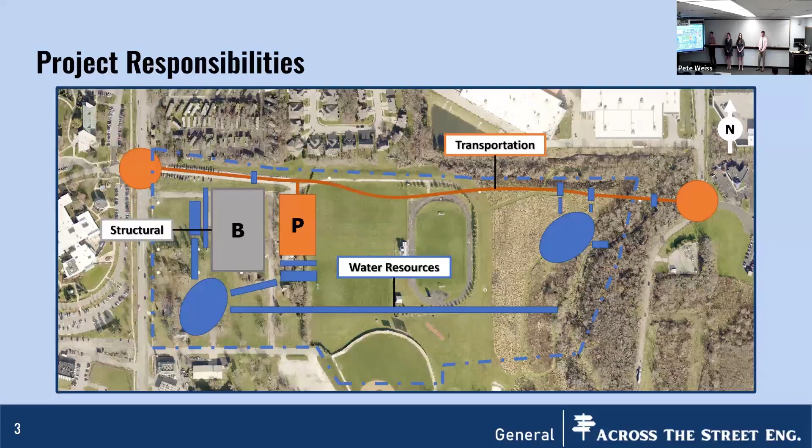As a bit of a reminder, these are our project responsibilities. We've been tasked with, in orange, transportation facilities connecting Silhavy and Sturdy Road, as well as pedestrian facilities and a parking lot to accommodate the new academic building seen in gray. And then in blue, we see the water resources portion, which is managing stormwater runoff. To start us off technically, I'll pass it to Jolie Overstreet.

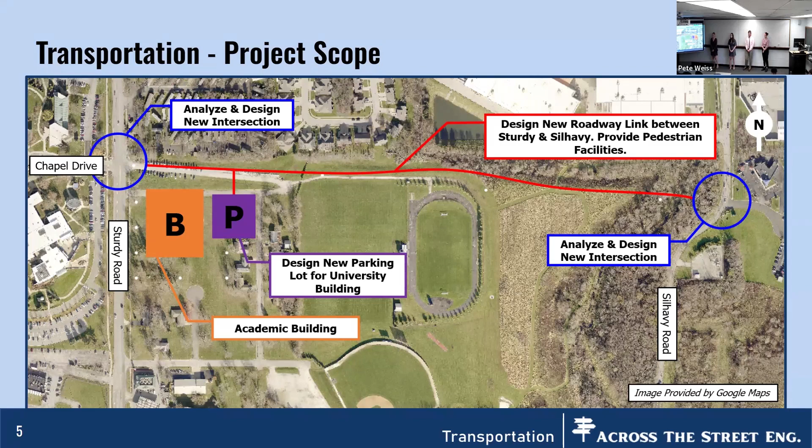Thank you. So Allison briefly went over my scope for the transportation side of the Eastgate development. Just to remind you, I was in charge of designing the new roadway between Sturdy and Silhavy Road, and this will be referred to as the Chapel Drive extension. Along this extension will be pedestrian facilities. After that roadway was designed, I also analyzed and designed new intersections at Chapel Drive and Sturdy Road, as well as at Chapel Drive and Silhavy Road. And finally, I was tasked with designing a new parking lot for the university building that will be developed on the Eastgate site. So the first thing that I looked at was the design criteria.

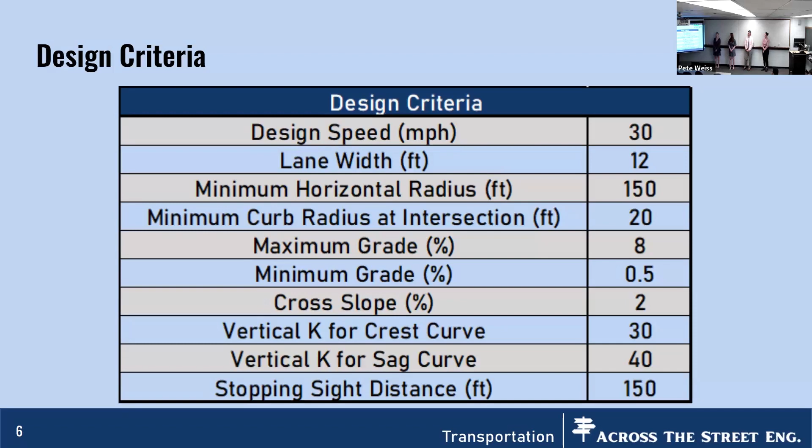All of this design criteria meets the Valparaiso city standards that are posted online, with the exception of the lane width. The city of Valparaiso outlines that they would like a 20-foot lane width. However, we spoke with the city engineer and they approved a 12-foot lane width for this project because we won't need any on-street parking here. And so with that, we can start to take a look at the typical sections.

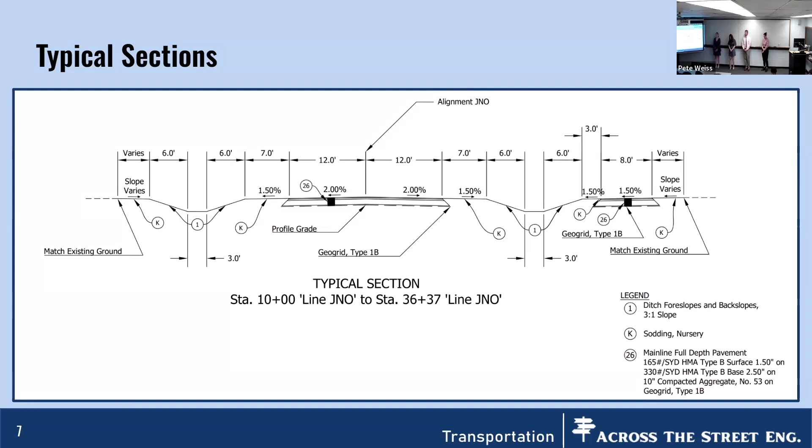You can see that there's 1 travel lane in each direction, both of which are 12 feet and have a 2% cross slope. Over on the right side of this image, which would be the south side of the road, is an 8-foot multi-use path. Both of these use an HMA typical cross section per the Valparaiso city standards. You can also note that on these typical sections, all of the water would drain to the ditches off the roadway, in between the roadway and the multi-use path.

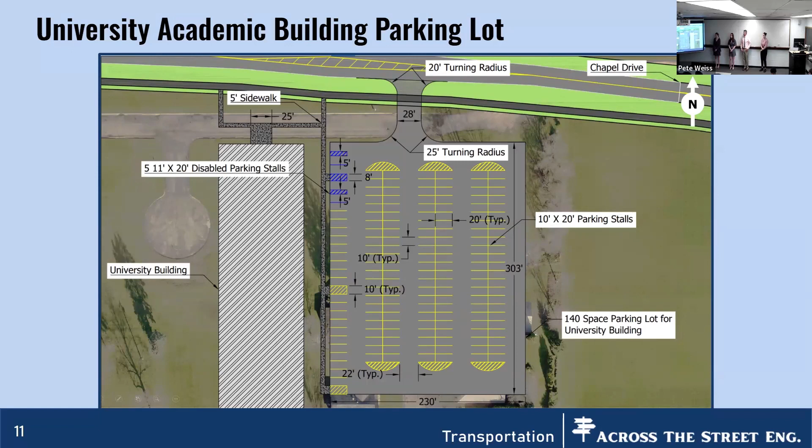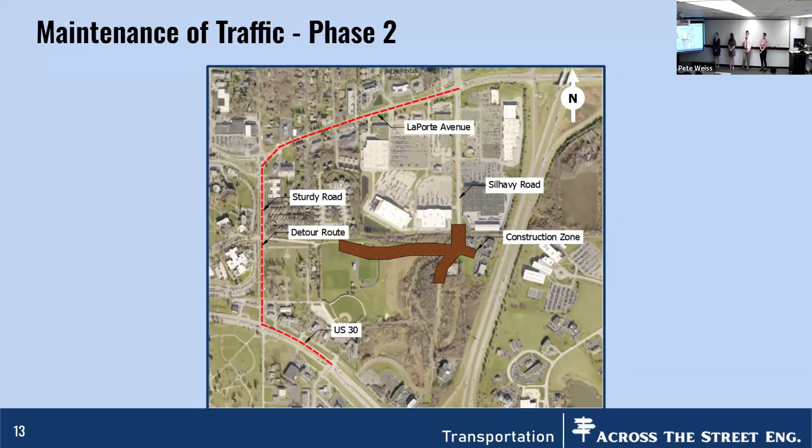And in order to design all of this appropriately, we had to come up with a construction cost via the INDOT bid items list. And so the major costs that we had within this project were excavation, aggregate, and then the signalized intersection. And it comes to a total of about $3.3 million. And then when you add in the 20% contingency, it's about $3.9 million. And so with that, I will pass things along to Bella, our structural engineer.

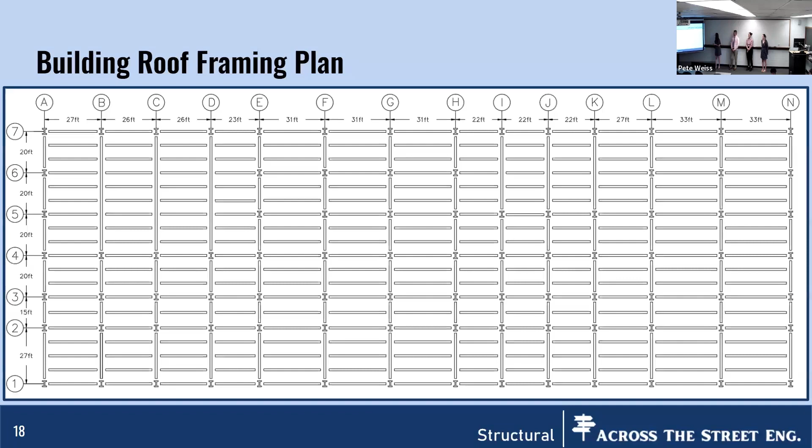Taking a look at the roof framing plan, we see that there are varying beam and girder lengths, and this is a result of taking into consideration building components as well as existing buildings on the university's campus, as well as published values for different occupancy sizes and room sizes. And that's where you get the variation between all of the member lengths that we will take a closer look at throughout the presentation.

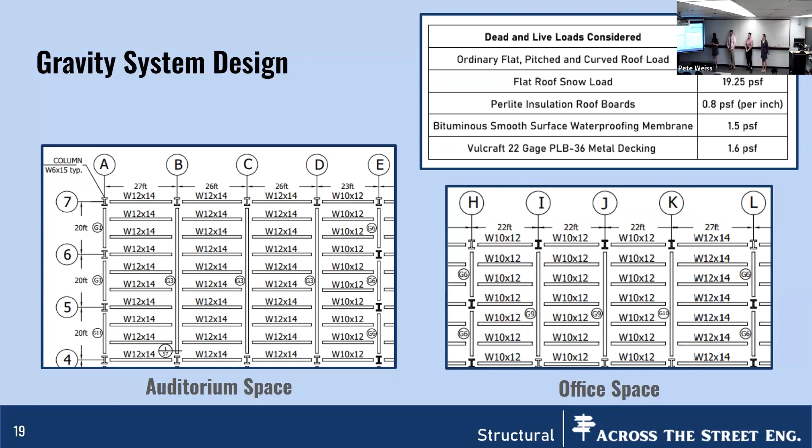And so to highlight some of the additional considerations, there were pretty consistent columns throughout the building, as you can see by the lighter and the darker members in these 2 images. However, the highlighted columns are actually columns that were of larger size to accommodate the larger members that are spanning across these areas.

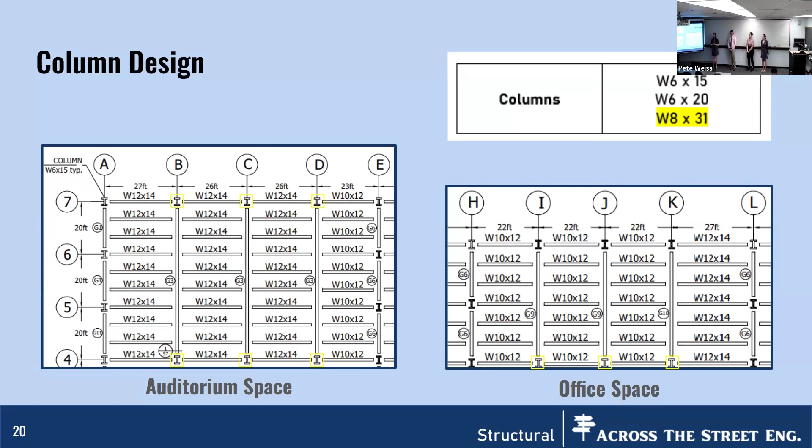These columns were used to not only support the self-weight of all the girders and the beams that are lying on them, but also the loads that were previously mentioned. And then shifting to the lateral design of the building, this is where we added the bracing members to ensure that the nodal deflections of the building were satisfactory based off of published codes. So you can see in the chart there, we considered seismic loading as well as wind loading to ensure that the members were able to support when these loads are acting on the building.

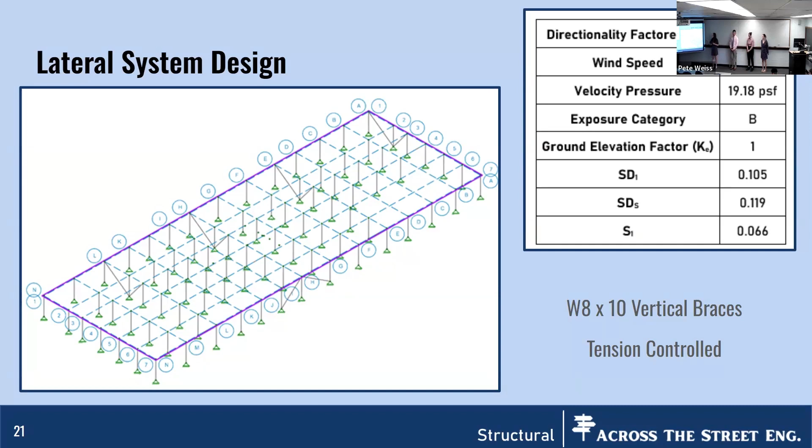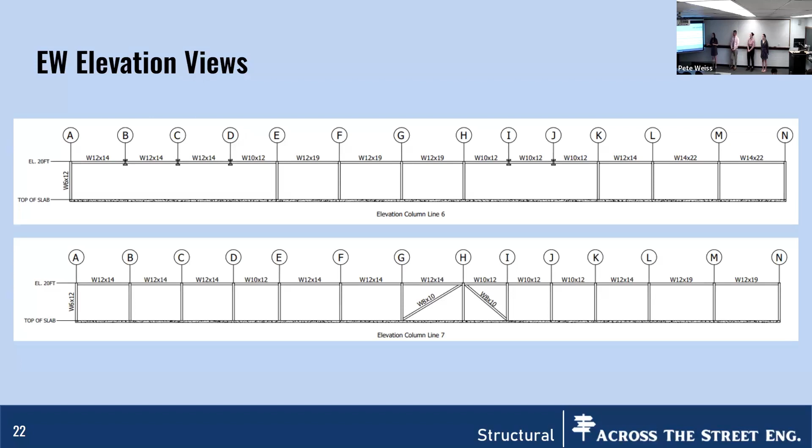So the braces that were added were W8x10 vertical braces that are tension controlled, and we'll take a closer look at the tension members in the upcoming slides. So to provide an example of a section cut of the building, you see the elevation views on the east-west side of the building. And these are the only two bracing members that were added, and they are on the exterior portion of the building. However, I will note that all of the braces were added either on an exterior wall or on an interior wall throughout the building, so it wouldn't interfere with a space that had been allocated for rooms and hallways.

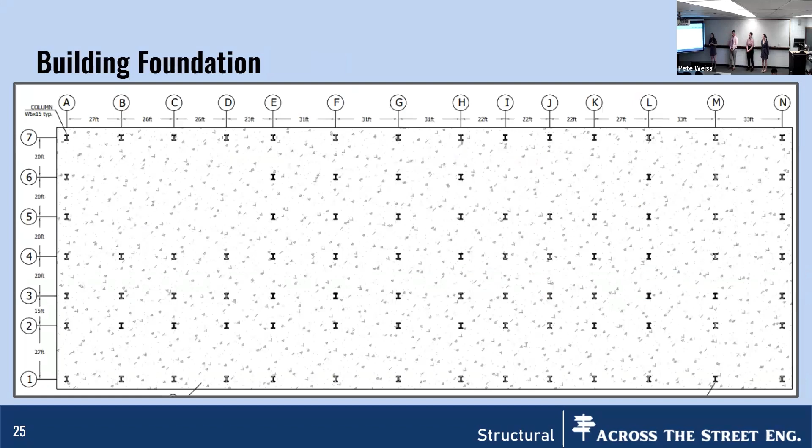And also, I would just like to note that through these images, you can see that the elevation of the building is 20 feet from the top of the slab. And we will talk about the slab in the next slide, where we talk about the building foundation. So to take a closer look at the building foundation, you'll see that past the exterior columns, the slab actually does extend. And the design of this slab was a 3 feet design to make sure that we're accounting for erosion.

And so in designing the slab, we considered all of the occupancy floor loads that would be acting on the building. However, as highlighted, the 150 PSF was used because the auditorium space will consider the largest load. The next after that would have been first floor corridors for school. So we decided to over design slightly just to ensure that this whole design would satisfy the entire building. So the thickness of the slab is 7 inches, and that was to ensure that between the ground floor elevation of the earth and the steel reinforcement that was used, there was a 3-inch cover, which is the minimum required.

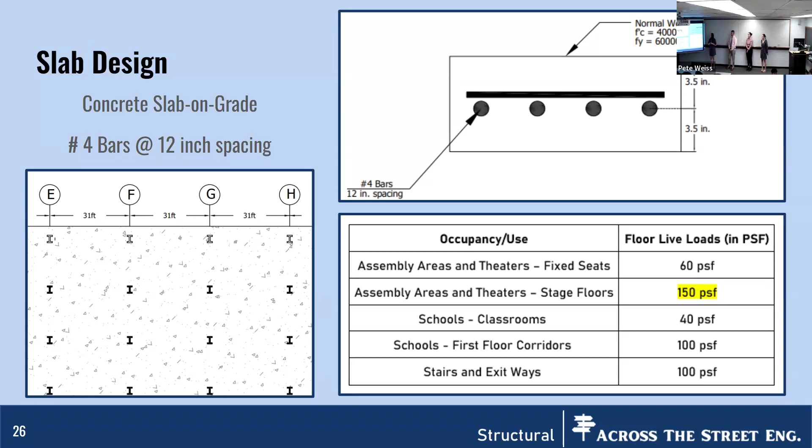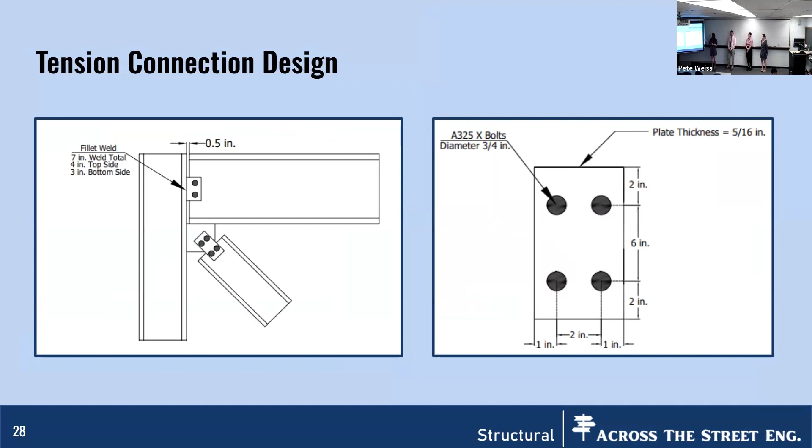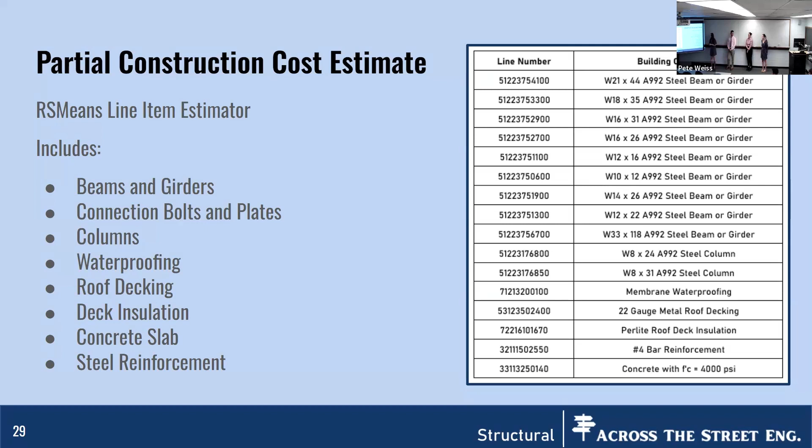And finally, to touch on the cost of all of this. So I put partial construction costs because the construction cost that I'm providing is only based off of the structural components that I have mentioned, which would be the beams, the girders, the columns, all of the bolts and connections, as well as the material for the slab, as well as the material for the roof. And as you can see in the image, that's the breakdown. However, I just wanted to kind of bunch everything together so it's easier to look at.

And you can see that the final cost of all of these members is a little bit over 1.1 million. However, I will note that in the final cost that you will see at the end, I did use the RSMeans square foot estimator rather than the line estimator that was used to determine all of these values, because that cost will give an overall design cost for the whole building, not just these components, because these components don't consider the walls and all of the finishes that make the true cost of a building.

And now I will pass it over to Chance. Thank you, Bella.

So as Bella said, I'm Chance. I'm the lead on the structural concrete alternative. So just a quick project scope on that. The main difference between my building and yours, mine is a 2-story building. It includes a restaurant as well as classrooms and offices. And it has an elevated walkway, so it's 2 separate buildings connected by a walkway. And I have a slightly smaller real estate. I'm at 26,000 compared to her.

So the work completed by us. We designed the floor plan. We determined all the loads, like where they're located, things like that. We determined the beam, slab, and column dimensions. We also determined the shear reinforcement and finally the cost.

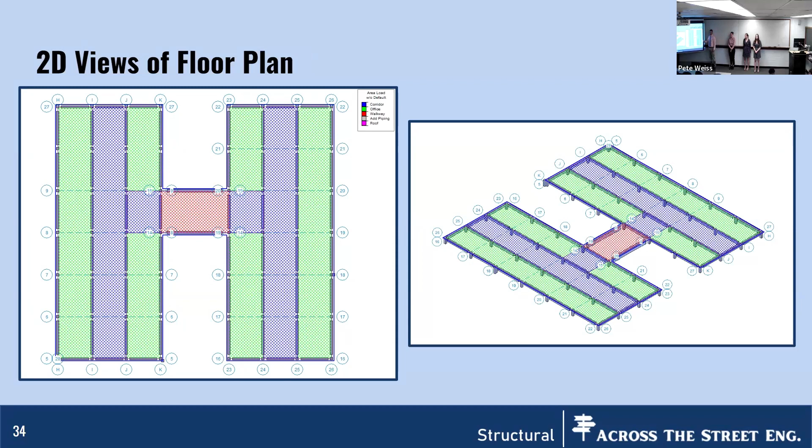So here's some load coordinated views of the floor plan. In green, you have your classroom loadings, in blue, your corridor, and in red, your walkway loadings. To be on the safe side, we went with corridor for everything, just to over design, make sure we're structurally sound. So then the loadings applied. Again, these are all the things we actually considered, but we ended up going with corridor just because that's what was applied to the building.

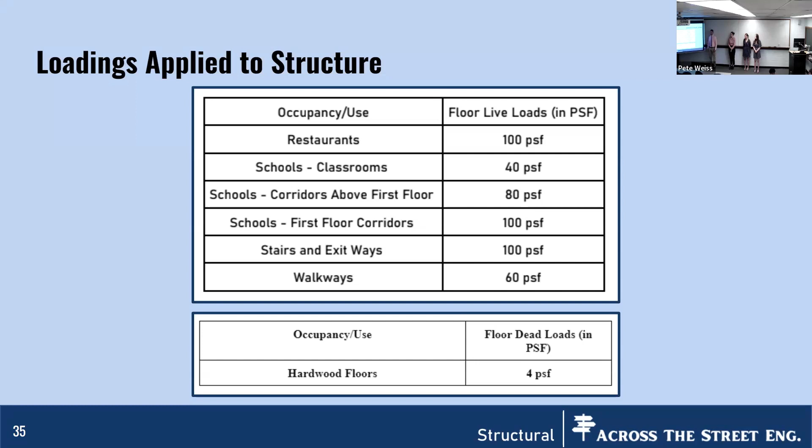You'll notice the restaurant load is bigger. However, that's located on the main floor, so we're not worried about that in the building. And then the hardwood floors, we included dead loads as well. This does not include lateral loads. That was input in RISA 3D, which has a risk category in wind to assess that.

So we have a length of 20 feet. That's for every vertical beam running in both the outside buildings. Those have a height of 18 inches and a width of 12. And then our walkway beams, we have a length of 32 feet, and each of which has a height of 28 and a width of 16. Again, the walkway here is bigger because it has to span farther, so more load is needing to be carried.

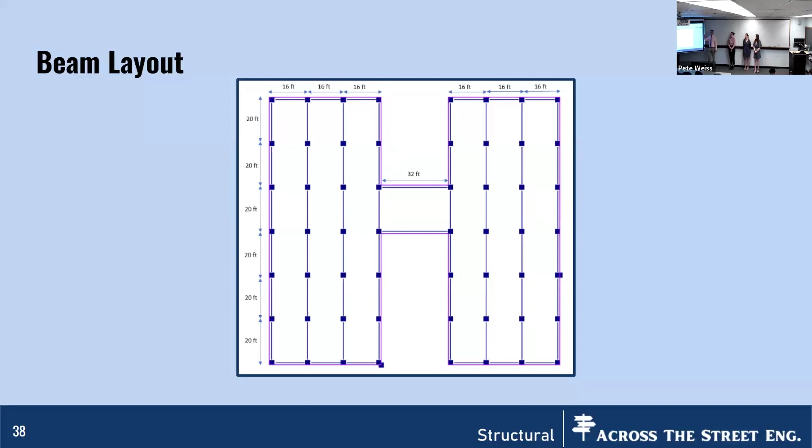So here's our beam layout I was discussing. Everything vertical over here, that's all the 20-foot beams. That's in the exterior of both buildings. Located in the middle are your walkway beams. And then this floor plan here represents both the roof and the second floor. Both are designed in the same fashion.

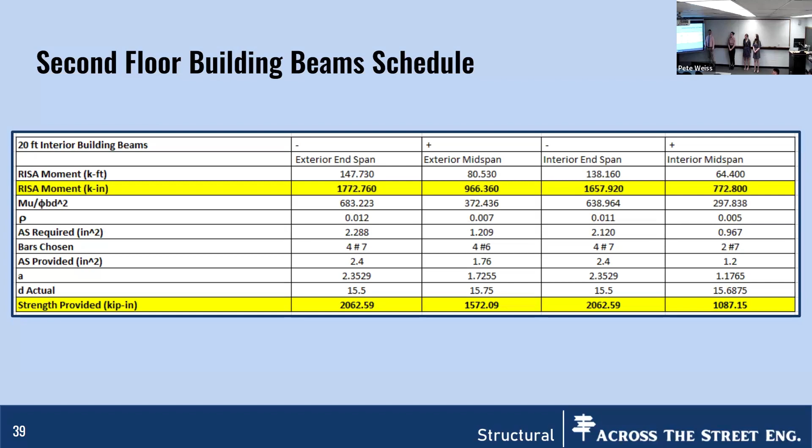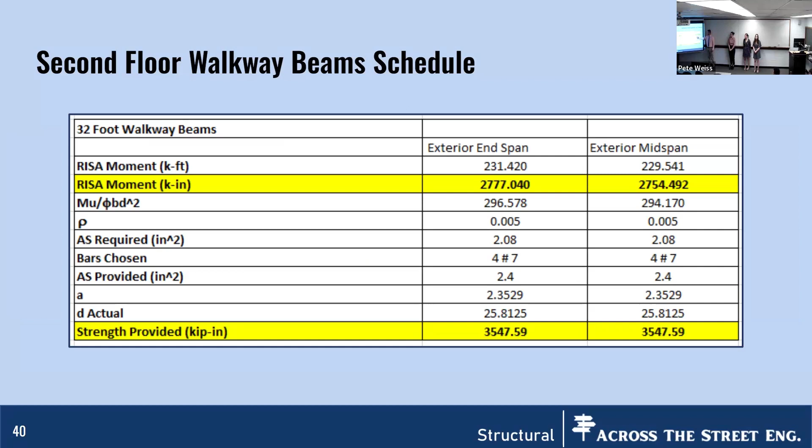In order to do that, that became a steel selection process. So we recognized our moment we needed. We selected steel to meet adequate strength and then determined the strength provided based on that. Similar situation here for the walkway beams. You'll notice these moments are bigger values. Again, that's because it's a bigger span, 32 feet compared to 20. But again, our strength provided exceeds our moment, so we're good, we're structurally sound.

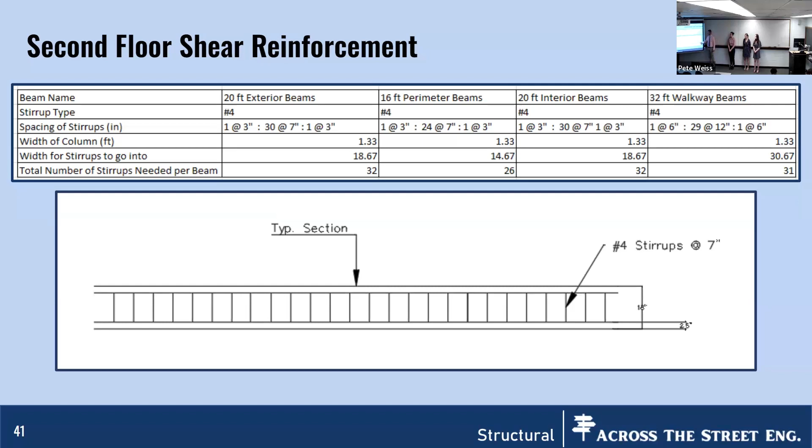And then our second floor shear reinforcement. So here is a typical section of one of the beams. We were able to space these stirrups uniformly. Typically, you cannot do this, but due to the low level of shear force that RISA provided for us, we were able to do it. So they were all spaced at 7 inches, with the exception of the 2 stirrups at each end of the beam, which were 3 inches. But again, this is just a diagram showing the shear reinforcement and why we were able to do that.

Walkway and building slabs are designed to span the distance in between the beams. So for the walkway, it has to span 20 feet, and for the building, it has to span 16. Additionally, we took into account temperature and shrinkage, as well as strength steel in both slabs.

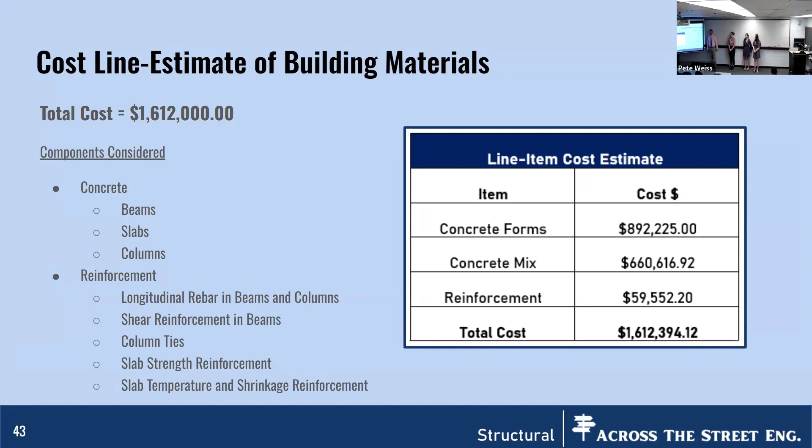And then finally, we have a cost estimate. As Bella mentioned, these estimates here are not based on any finishing. So this does not include drywall, flooring, any other finishings you'd find in the building. This is strictly, in my case, concrete and rebar, given I'm reinforced concrete. So as shown in that table, that's the amount of concrete I used. That's the amount of reinforcement I used. So my rough estimate is $1,612,000. And with that, I will pass it to Allison with water.

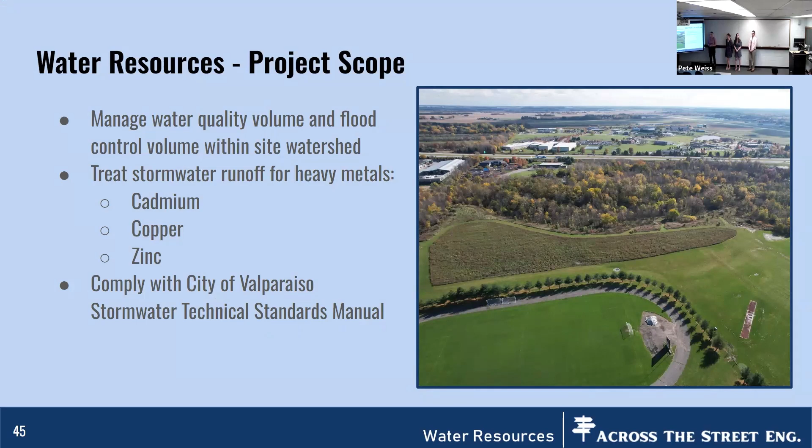As a reminder, for water resources, I was tasked with managing water quality volume and flood control volume within the site watershed. It's also an owner preference to treat that volume for that runoff for heavy metals, cadmium, copper, and zinc. And of course, we're looking to comply with local standards and requirements.

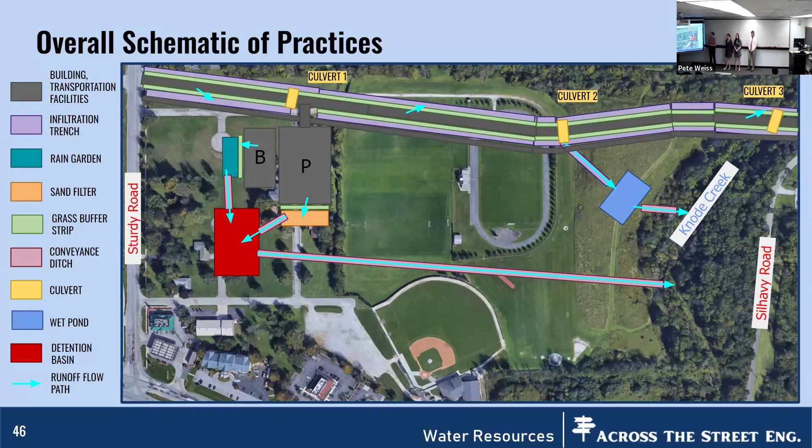Once again, here's an overall schematic of the practices. I'm not going to spend too much time on this slide because I'm going to delve deeper into each design. But one thing that I'm not delving deeper into is the grass buffer strips. So I wanted to note here that there will be grass buffer strips seen in green feeding off from the runoff from our new construction to the practices such as the rain garden, sand filter, and infiltration trenches. And those will have a width of 7 feet.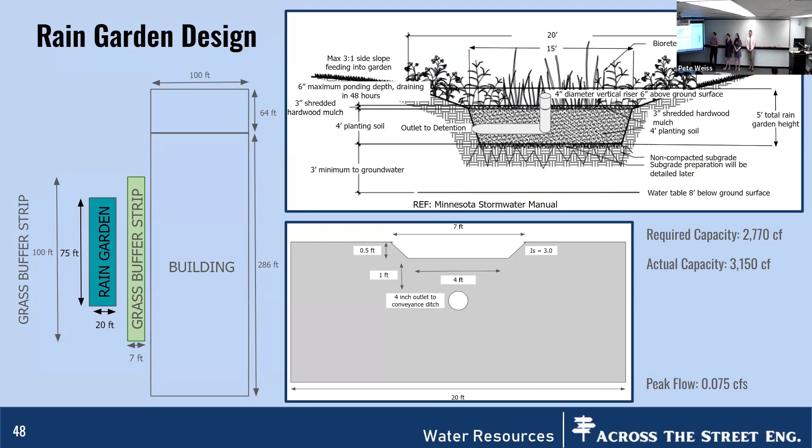Here are the design requirements and standards for the rain garden. And with this design, it has stayed relatively the same since our last progress presentation. And from the water quality volume, I found that it would have to have a required capacity of almost 3,000 cubic feet. And with the way that I designed it, it has an actual capacity of a little over 3,000 cubic feet. And for the emergency overflow weir, it would see a peak flow of 0.075 cubic feet per second.

Sand filter design requirements and standards, which I then used to design the sand filter, which has once again stayed relatively the same. The required capacity of the sand filter was about 5,500 cubic feet. And with the way that I designed it, it can have an actual capacity of 6,700 cubic feet. To the emergency overflow weir, we have a peak flow of 0.15 CFS.

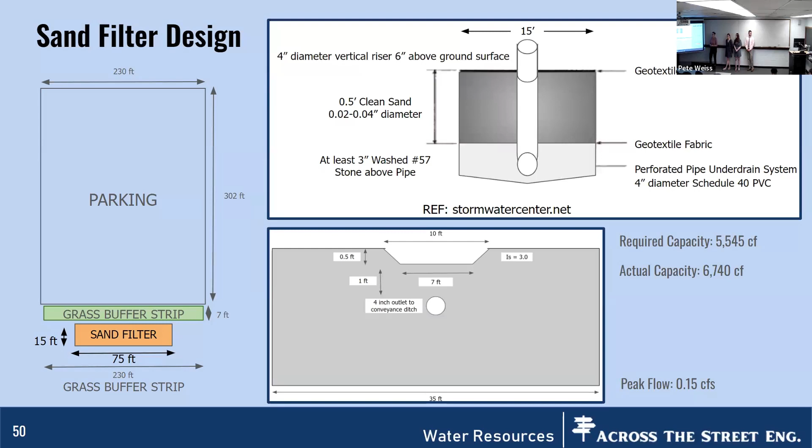The infiltration trench design requirements and standards that I used to design the infiltration trench. I used a little bit of the Indiana design manual working with Jolie Overstreet because the infiltration trenches are also serving as roadside ditches. So as you can see by the cross section, they look very similar to roadside ditches. The required capacity based on water quality volume for the trenches is around 6,500 cubic feet. But because I have it running the entire length of north and south of the Chapel Drive extension, the actual capacity is a little over 46,000 cubic feet, which I think could help with flood control volume as well.

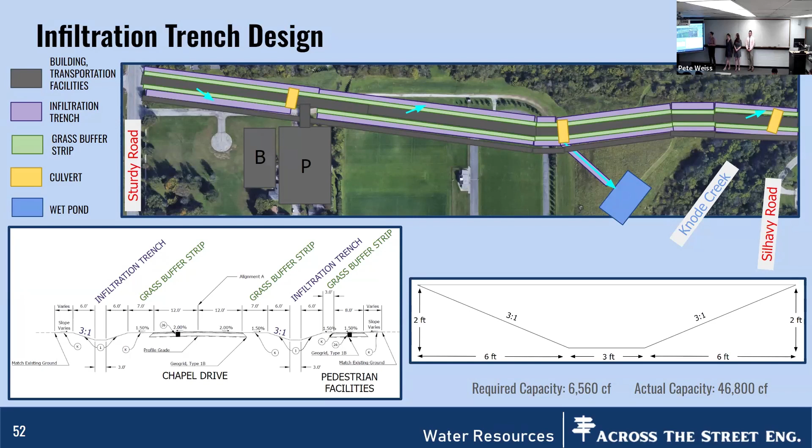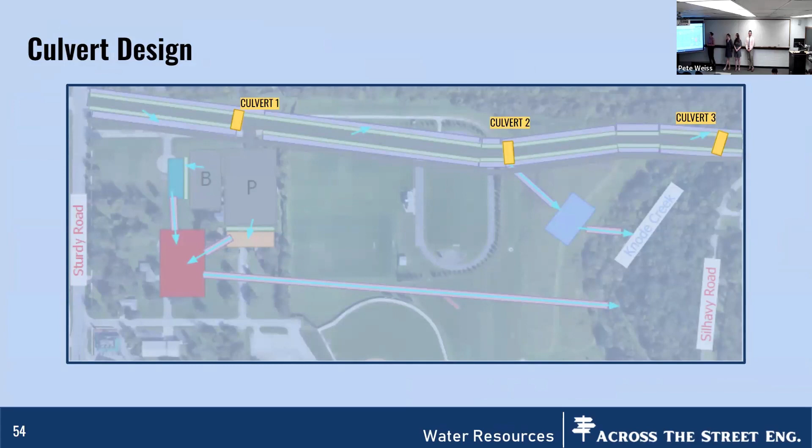For culvert design requirements and standards, there's really not much going on there, just that they should be capable of accommodating peak runoff from the 24-hour 50-year storm. But to be conservative, I ended up designing for the 100-year storm. As you can see here, I have 3 culverts to the east and the center, and then to the west going over Knode Creek. For culvert 1, I found a peak flow of 1.07 CFS. I selected corrugated steel in a circular shape with a diameter of 1 foot. And as you can see on the figure on the right, this was generated by HY8. The water profile is seen in blue and it's not overtopping the roadway, which is what we're looking for.

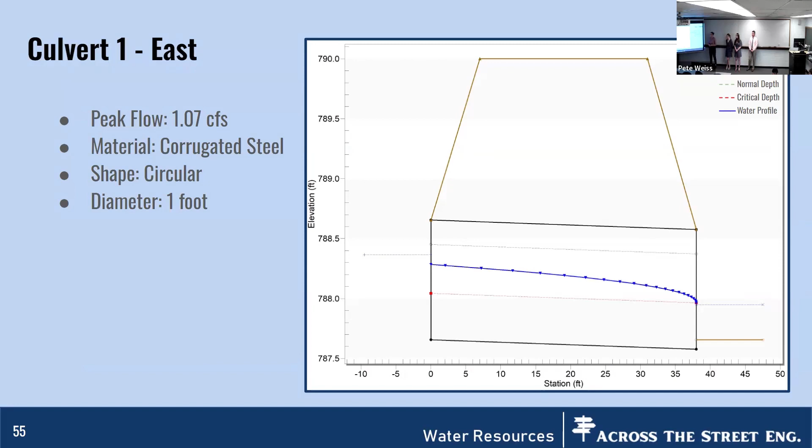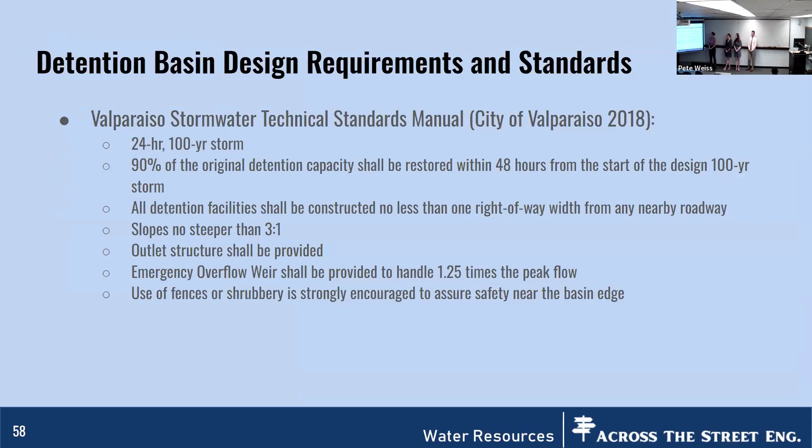For the detention basin, I designed it to look like this. I have 225 feet by 175 feet with a 4-foot depth, 4-to-1 slopes, which is typical. An outlet structure on the bottom of the basin, but slightly above because that's a requirement of the Valparaiso Stormwater Technical Standards Manual to avoid clogging. I've got 2 inverts coming from conveyance ditches, which will, in case of overflow, come from the rain garden and sand filter.

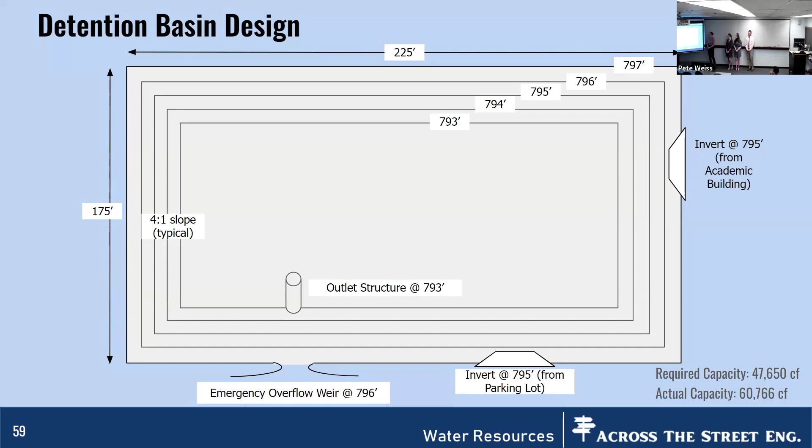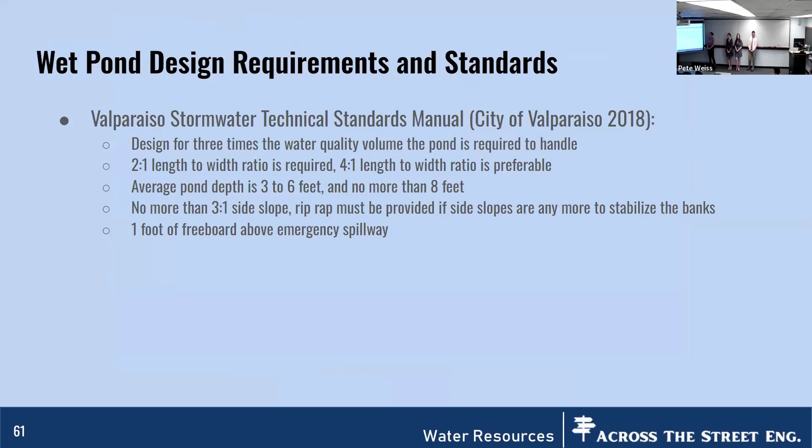For the wet pond, I looked at these design requirements and standards. The design is pretty similar to the detention basin: 100 feet by 50 feet with a 4-foot depth, 4-to-1 slopes. The only difference is the outlet structure, which is slightly higher than on the detention basin, to ensure minimum ponding so the wet pond stays wet.

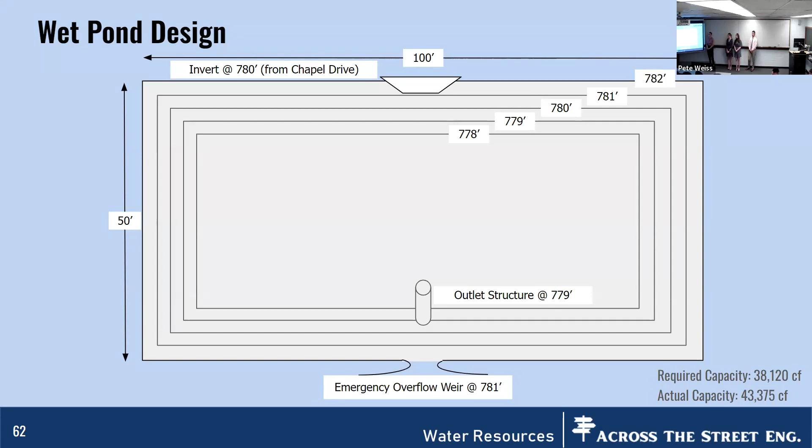I've got an invert at the top coming from the infiltration trenches in case of overflow. And in case of overflow of the wet pond itself, I have an emergency overflow weir, which once again feeds into Knode Creek. Here's a schematic of that overflow weir.

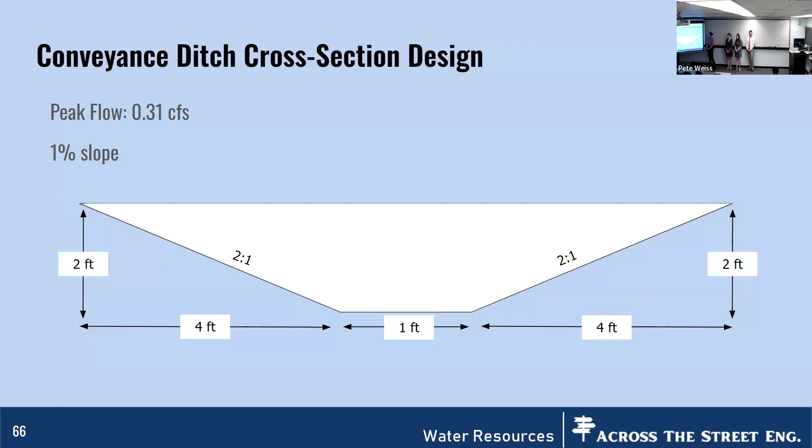For the conveyance ditches, the Valparaiso Stormwater Technical Standards Manual does not specifically list conveyance ditches, so I looked at the standards for vegetative swales since they're very similar. You can see my conveyance ditches here, mostly for overflow of the practices I've provided. I found these ditches would have a peak flow of 0.31 CFS, 1% slope, with a cross section of 1 foot bottom width, 2 foot depth, and 2:1 side slopes.

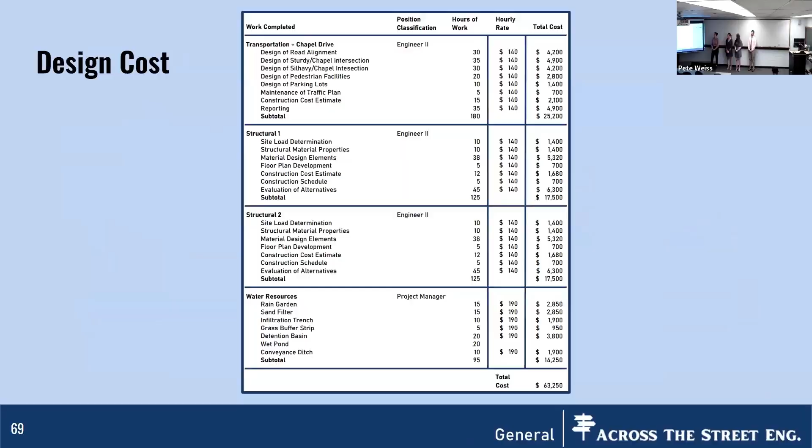Adding all of these practices together, I found the overall construction cost estimate for water resources would be $770,000. For our team, we had a design cost estimate of $63,000, and for the overall construction cost estimate adding all disciplines together, we had a little over 19.5 million, but with a 20% contingency, we're looking at a little under 23.5 million.

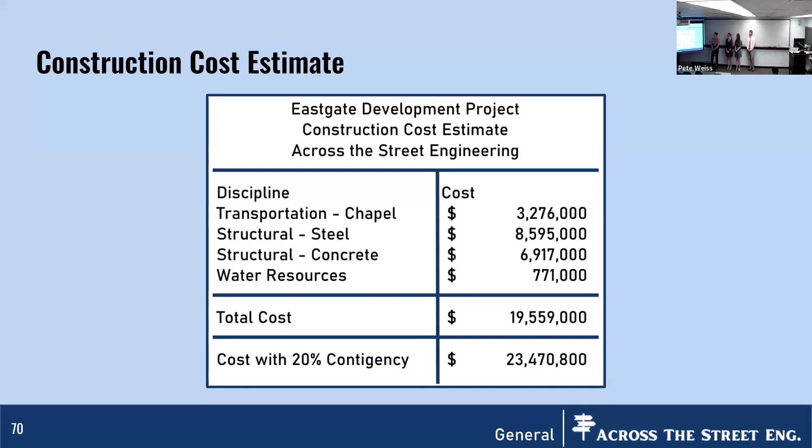For the Envision rating, we found we had an 81 out of 86. The reason we don't have an 86 is because some requirements were not applicable or not within scope, but we think the 81 is still highly beneficial because we're providing several social, economic, and environmental impacts that will help this community and the Eastgate development. With that, are there any questions?

Question about your infiltration trench: what's the media there, underneath the surface? Does that have to be backfilled with gravel in there? Probably - I didn't specify the type of media, but because the majority of the soil in that area is clay, that wouldn't allow infiltration, so it will have to be something that allows more infiltration. I've seen gravel, not quite boulders, but larger rocks used as well.

And then your storage capacity for the infiltration trench, is that below ground storage capacity? No, that is with 1 foot of freeboard and within the cross section itself, the entire length.

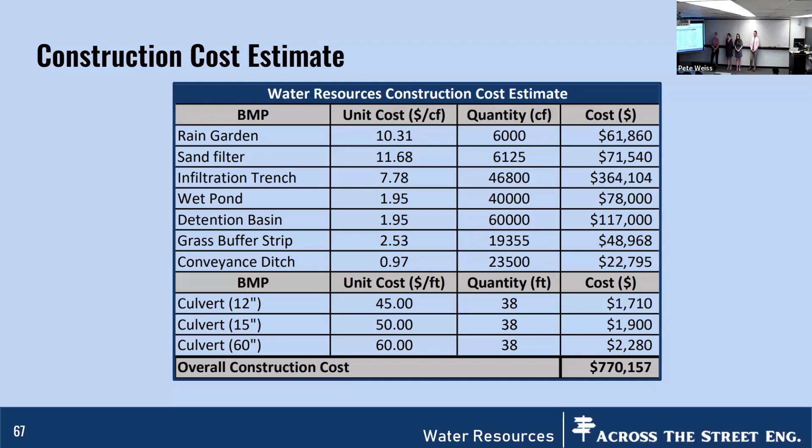Why are you using the swales or ditches for storage? It's not really for storage, it's just to convey the runoff in case of overflow in some of the practices - it's not serving as storage. It's just for if the rain garden overflows and the sand filter overflows, to feed into the detention basin. And then, god forbid, the detention basin overflows, that conveyance ditch would then feed to Knode Creek. So it's mostly just for overflow, not really storage.

Didn't you use a flow rate instead of cubic feet? That's what threw me off - when you use volume, it comes to mind that you're storing water in it, compared to here's the flow rate that can go through that swale or ditch.

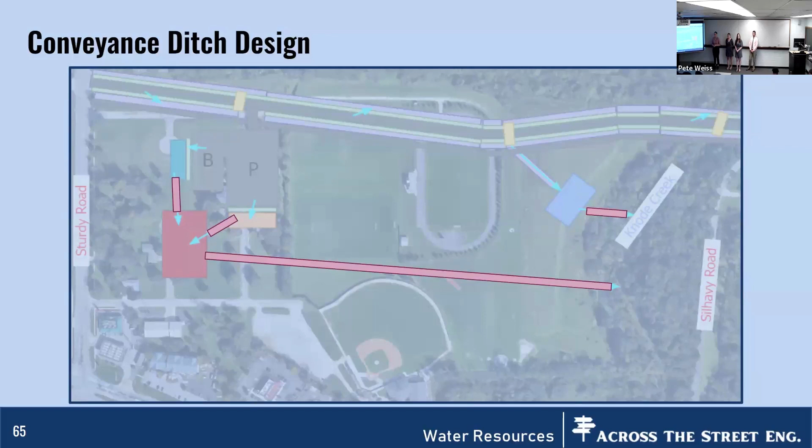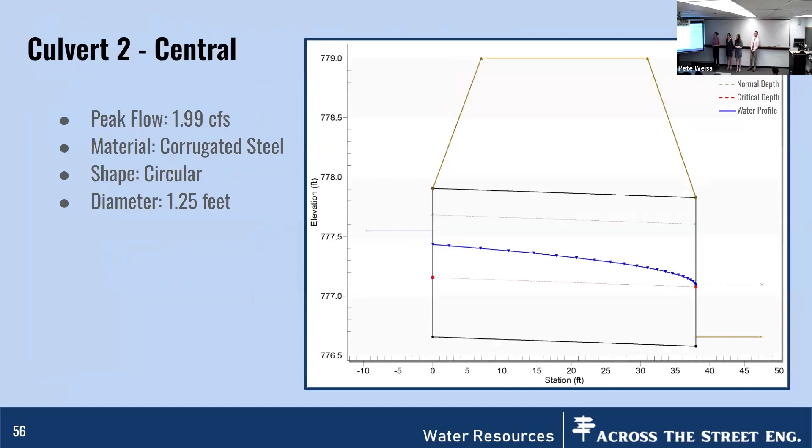Another question about the culverts: what is the fill depth above those culverts, especially the one that goes through the creek? I don't remember exactly off the top of my head, but if we look at the elevations here, it's looking to be about 1 foot. So I'm guessing it's that, but I don't recall exactly.

Okay, fine. Jolie, can you, not being a transportation guy, explain what level B is and why not level A? Why do you want to go for a B instead of an A in the class?

A level of service A is really hard to achieve in actual practice and design, because that's basically saying you're perfect, but nothing in real life is ever actually perfect. When I was analyzing all my intersection alternatives last semester, the only one I found with a level of service A would be a roundabout at Sturdy Road and Chapel Drive, but it didn't make sense because of all the university buildings and houses nearby. We would have to buy up a lot of property, and we'd probably have to take away part of Gellersen, which we wouldn't want. Roundabouts are also really expensive and have a lot of maintenance.

Is it about the cost, or when I say level A versus level B, what - for example, safety, additional stuff we'd get from level A versus B, for example?

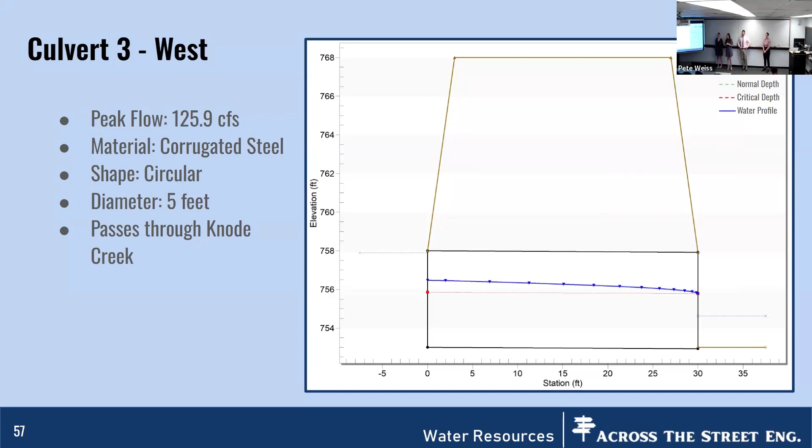So how deep is the deepest girder in the building? I think it might have been, trying to think, because I used those girders, I believe they were W30s. W30 by 60, I think. But I can't exactly remember. I forgot my steel design, but I saw something like 33 by 118 or something. I believe it should be in the section.

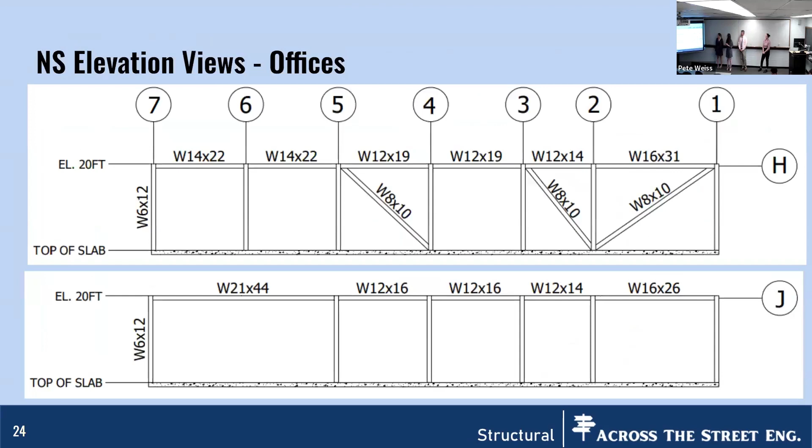But I'm sorry, I will get there. Sorry, W30 by 90 is the member that will be there. So how deep is that? W30 by 90? Off the top of my head I don't remember, unfortunately. Around 2 foot 6 inches.

I know, thank you, no problem. You want me to just pass it down the line? No, I don't have questions for Chad. Other questions?

Is 5-foot culvert standard? Tell me, I don't know. It's mostly, you kind of went from like 12 to 18, yeah, 2 foot, 4 foot, 6 foot. Oh, like the standard sizes that you can buy it in. Can you actually get one? Yeah, I would guess it might have to be specially fitted. Or you make it bigger. Yeah.

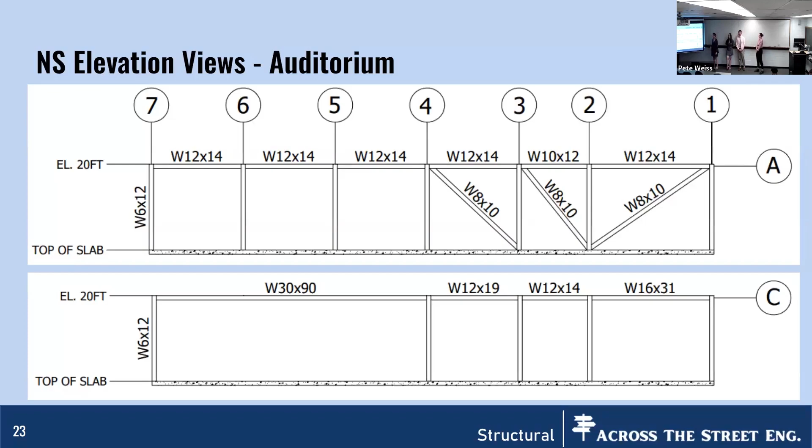I figured I wouldn't spend too long, for example, what is that, 44? I'm not super happy with how the dimensions actually look, so I'm sorry about that. The 44 is the length of the storage for the through and right turn movement. Okay, so it just looks a little wonky, and the 153 that overlaps with it is the total length of the left turn lane, including the deceleration, storage, and taper. Okay, I just didn't see it. Yeah.

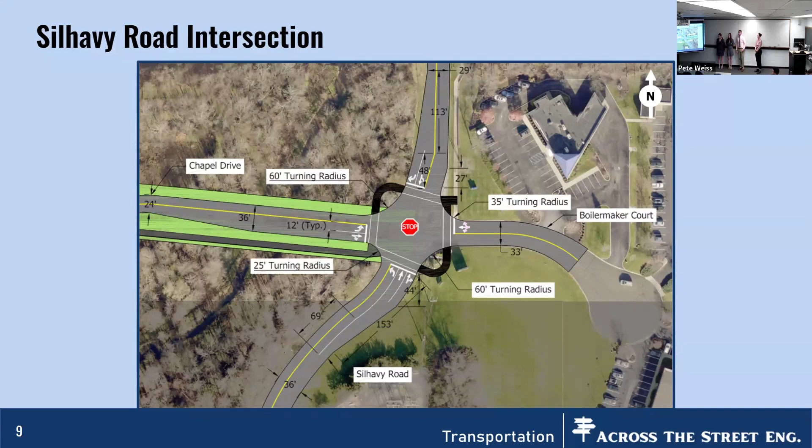So for the concrete structure, how does the slab connect to the beams, or does it sit on top? Yeah, so it's on top of the beam. So when I designed the beams, I can go to a typical beam here, sorry about that.

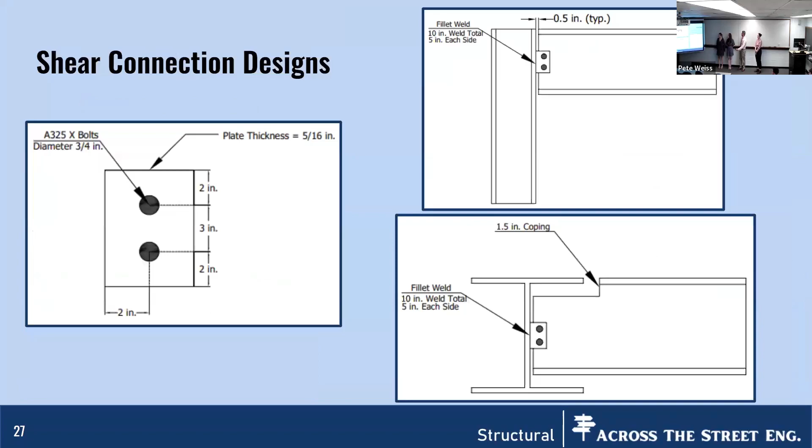I think that's all I had. You answered my question with one of your later slides. I was going to ask what direction your bracing, the I-beams, which way did they go, but that showed up in that later slide.

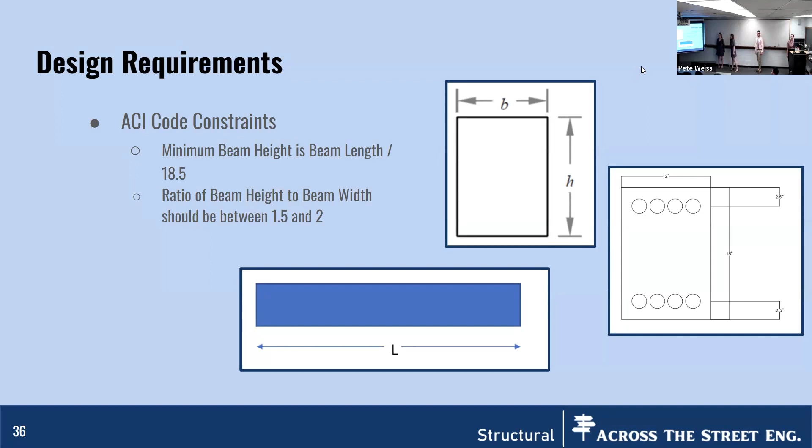Any questions online? I hope not. I don't see anything in the chat box. They're a quiet group. Thanks. Go, go, yeah, pause.